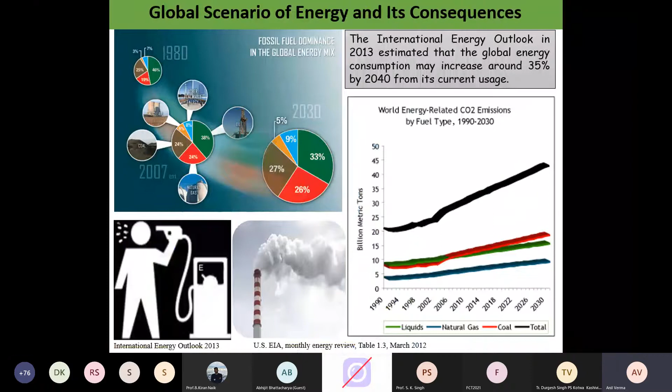Okay, not only that, not for the vehicle, and for other activities also, in order to generate the electricity that we are using, we have to be dependent primarily on the coal based power plant, which emits a lot of CO2. So this all indicates that the CO2 has to be captured, or it has to be sequestered. So just one technology, which is the CO2 capture and sequestration, I'll discuss.

So if you talk about the CCS, which is the carbon dioxide capture and sequestration, it primarily consists of three terms: the capture, the transportation, and the storage. Okay, so typically if I give you some data, in a pulverized coal based power plant, you can get around 13 to 15% CO2 in the flue gas. This is a typical data. Okay, so 13 to 15%, it can vary.

So the present technologies in the capture domain are post combustion, pre combustion, and oxy fuel firing. So if you see post combustion, as the name is indicating, you are going for the combustion, then after that you are capturing the carbon dioxide. So if this is a coal based power plant, the fossil fuel and air you are utilizing for burning of the fossil fuel.

So you are using the air, and air is having a lot of nitrogen, which is around 79%. So that dilutes the CO2 in the stream. But anyway, we have to capture it. So we capture it, and then this carbon dioxide is ready for some purpose. It may be for storage or for some other purpose.

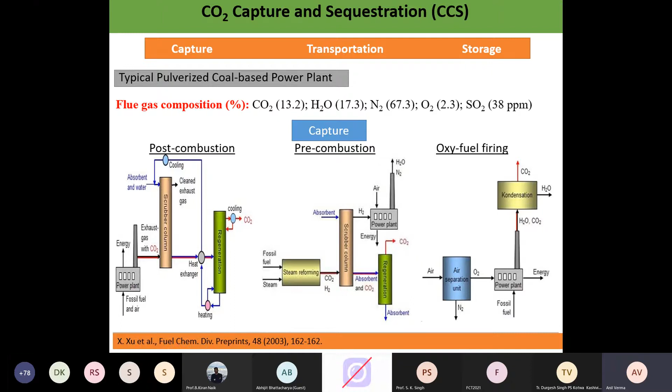Similarly, the oxy fuel firing. In oxy fuel firing, we separate the nitrogen from the air. So this is the air separation unit. We take out the nitrogen, we send almost pure or very high concentration oxygen into the power plant, so that once we get the carbon dioxide, it is not diluted with the nitrogen. Otherwise, if it is diluted with the nitrogen, then the separation process is a little tricky and more cumbersome.

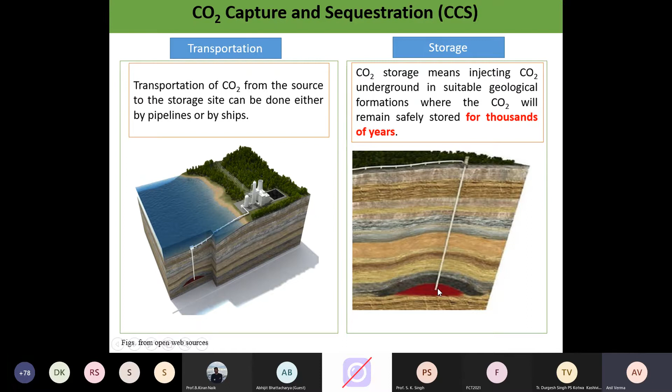Now, once the CO2 is available, we have to transport it. Then we have to store it, and storage is primarily in the geological sites, with the expectation that maybe in thousands of years we can get the hydrocarbon, but 1,000 years is a long time. Okay, very huge duration. So that may not be feasible, and at the same time we don't know what the after effects are once we store this CO2. Also, storing the CO2 in these geological sites requires a lot of energy. So again, that's an issue.

Therefore, people are trying to convert this carbon dioxide into various products. There are various technologies like chemical reduction by metals, thermochemical, photochemical, and so on, and also the electrochemical route. So we can make methane, we can make methanol, or from methanol we can go for dimethyl ether, or we can make syngas from CO2, CO plus H2. Once the syngas is there, this is basically the building block for all the other chemicals, and we can synthesize the other chemicals.

For example, methanol and DME are being considered for transportation fuel in India. And if I just tell you about Brazil, they are using M15 and M85 fuel, which is known as FFV or flexible fuel vehicles. That means 15% methanol they add in the petrol or diesel, and similarly 85% also they can add in the motor fuel.

But at the same time, the government of India has also mandated that around 5% ethanol should be blended with petrol, and the target is that by 2025 it should be 20%. But the issue is that we have to make the ethanol. Now ethanol is used for a lot of other things, and how they are produced, so there are a lot of issues.

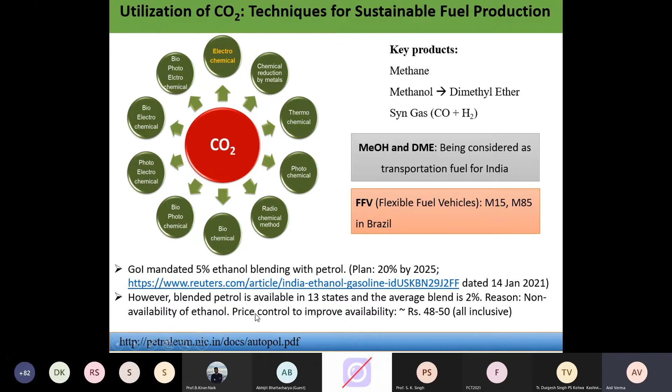So blended petrol is hardly available in 13 states, and the average blend is around 2% because of the non-availability of the ethanol. Okay, so also the price control to improve the availability and all those things are also there. So I'm not going into those details.

Now, one of the future technologies for sustainable development is emission to liquid. That means from the carbon dioxide, if we can make some fuel, it may be liquid or it may be solid or gas, but here I've just written emission to liquid. Okay, so I will talk about one technology which is electrochemical technology, where we can use the carbon dioxide and the water to make various products, various chemicals.

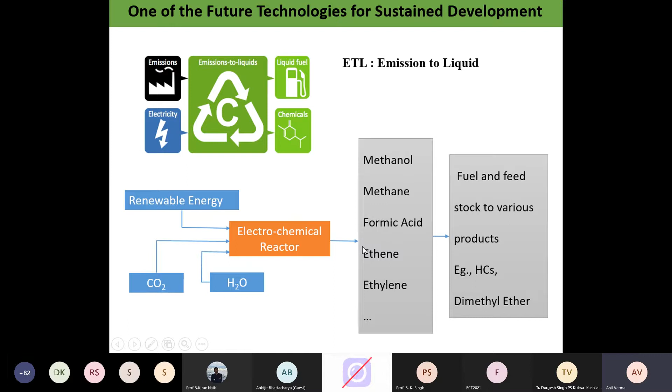So these synthesized chemicals can further be used as a fuel and feedstock to various products. Okay, and also, if it is methane we can use it as CNG, fuel for the CNG vehicle, and we can also make other fuels. So what is the concept? The concept is simple. The concept is the electrochemical reduction of carbon dioxide into fuel.

So the carbon dioxide that we are capturing from the point sources and the distributed sources, that means from the environment or from the flue gas, we are able to take out the carbon dioxide. This carbon dioxide we can push into the electrochemical reactor along with the water, and because the reaction of the CO2 and the water is a non-feasible reaction, you have to provide energy in order to get the reaction.

Okay, so we can use renewable energy, for example wind or solar, and if we utilize that energy to convert this CO2 and water into fuel or chemical feedstock, then we are primarily reducing or utilizing the carbon dioxide, making fuel and chemical feedstock, and at the same time we have taken this renewable energy and converted it into chemical bonds.

Okay, so renewable energy storage is also there. It looks very fascinating, but it has a lot of challenges, because first thing is that the technology is not mature. Okay, proof of concept is done. People are working to solve a lot of issues, and this technology is slowly taking momentum. In fact, it has taken a good momentum.

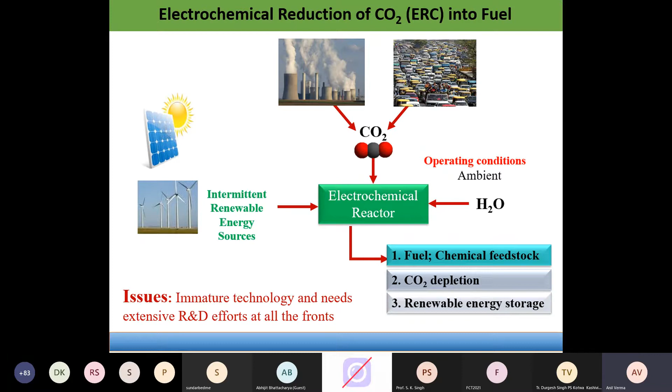In fact, there is a special journal launched, I think, 8 to 10 years ago, the Journal of CO2 Utilization, which has an impact factor of 5. So you can understand how many people are reading and using those research papers. That shows that R&D efforts are going on, and maybe soon we will have this technology at the industry level. So the basic principle is very simple.

So what happens? The water breaks in the anodic chamber, and it provides the electron and the proton. This electron and proton react with the carbon dioxide in the cathodic chamber and provide, for example, methane. Here in this case you can see it is methanol, and the overall reaction E naught is minus 1.06, the standard potential, minus 1.21 volt. So that means we have to provide this energy.

Though these are the two reactions, the main important thing is that for the H+ that we are generating, in most of the cases, or in almost all the cases, a significant part of this H+ recombines with the electron and gives hydrogen gas.

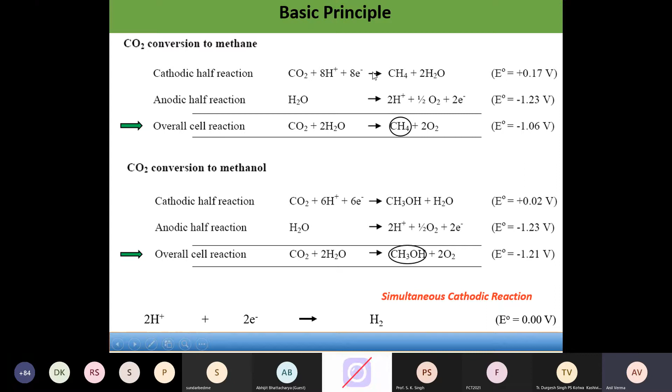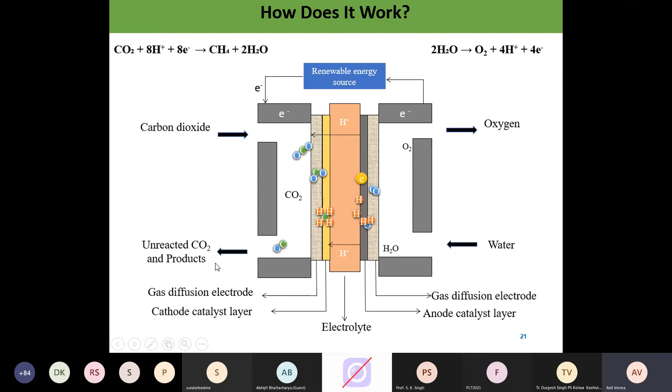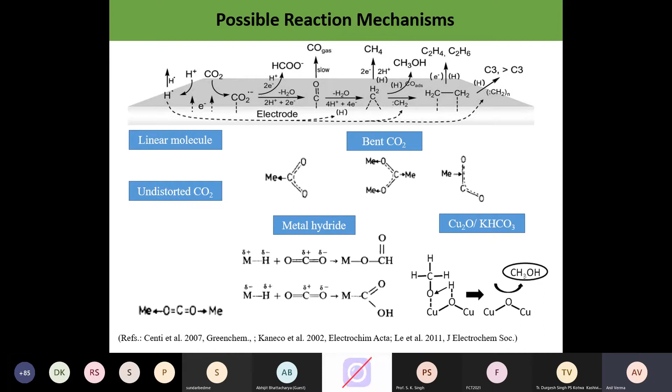So why is a lot of energy required for CO2 conversion? The reason is that CO2 is a straight molecule. O double bond C double bond O, 180 degrees. So in order to make it active, we have to provide the energy so that we can bend the molecule. Once we can bend the molecule, then it will go for the reaction, or we have to ionize the carbon dioxide into ions by bending or by providing the electrons, so that it can easily take part in the reaction.

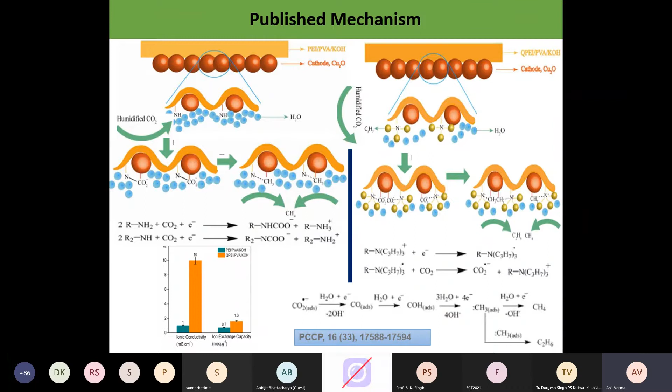So we have proposed the model where we have made a newer membrane, which is a polyethylene imine based membrane in the KOH environment. We have given that mechanism, and it was published in PCCP, which is a very good journal. And there we have discussed how that particular membrane or the electrolyte affects the selectivity as well as the yield. So the performance of the developed electrolyte for ERC we can see over here.

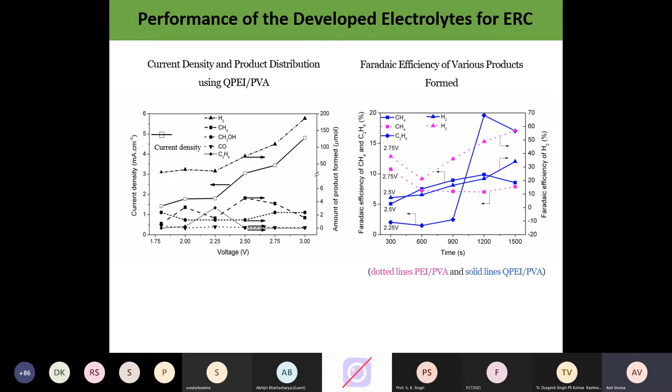We can get C2H6, CH4, and in certain cases you can see methanol also. The Faraday efficiency for these C2 products and other products is maybe 10-15%. But in certain products, results I am not showing, we are getting up to 60% Faraday efficiency. So this is just a glimpse of one of the CO2 electrochemical technologies that we have seen.

Now, coming back to motor vehicles, we have seen that the global motorization level is increasing. That means urban motor vehicle traffic will also increase, and this disruptive rapid increase in urban traffic is posing serious sustainability issues. What are the main concerns? Number one, air quality. Number two, the need to comply with greenhouse gas emission targets.

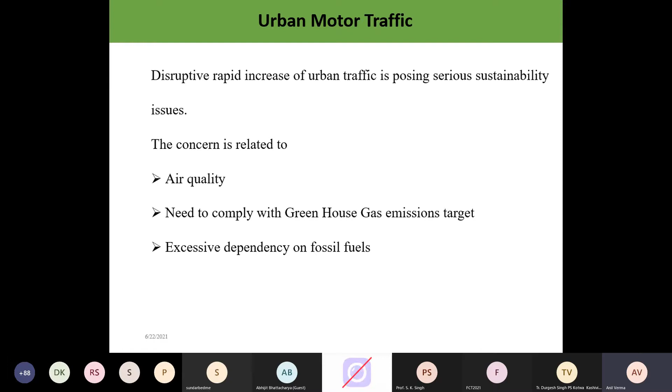So we cannot say we don't bother about air quality, because we are in the IPCC also. The government of India and all the governments have given some targets: we will achieve this target for greenhouse gas emissions. So we have to comply with that. At the same time, we are excessively dependent on fossil fuels, so that dependency we should also reduce slowly.

Now, there are two strategies. One is the short-term strategy. That means whatever IC engines we have, we have to increase their efficiency so that per kilometer of distance covered we require a little less fuel, and at the same time waste heat harvesting: whatever heat we are wasting, we have to harvest or utilize it. At the same time, hybrid power trains are there.

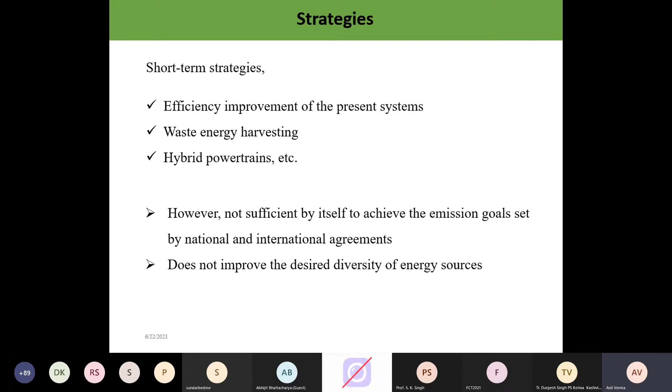However, these are not sufficient. These are the short-term strategies, and they are not sufficient. We have to come up with newer technologies. So for long-term technology, if I focus on the vehicles only.

So the main alternatives to the traditional internal combustion engines are the plug-in hybrid electric vehicle, or the full hybrid, or the full electric vehicle, which is known as either electric vehicle or battery electric vehicle; it is the same thing. So PHEV, which is the plug-in hybrid electric vehicle, is nothing but you have a plug on board, apart from that hybrid engine.

And EVs allow reduction in the global fossil fuel consumption. Also, it is the key technology for the future smart grid. So just quickly, if I see the classification of the electric vehicle, I can see the types of vehicles that we have: the traditional vehicle uses gasoline or diesel as the energy source, and the propulsion is with the help of the combustion engine, right?

If we are talking about the hybrid vehicle, hybrid means we have the two technologies. Propulsion will be from the combustion engine, and it has the combustion engine as well as the electric motor. So I'm not going into the detail of these hybrid electric vehicles. Ultimately, I'm trying to focus on the battery electric vehicle and the fuel cell electric vehicle, and in future maybe the solar electric vehicle also. The solar panels may be so effective that you can just put them on the rooftop, and they will provide enough energy so that you can charge the battery, or you can directly utilize it.

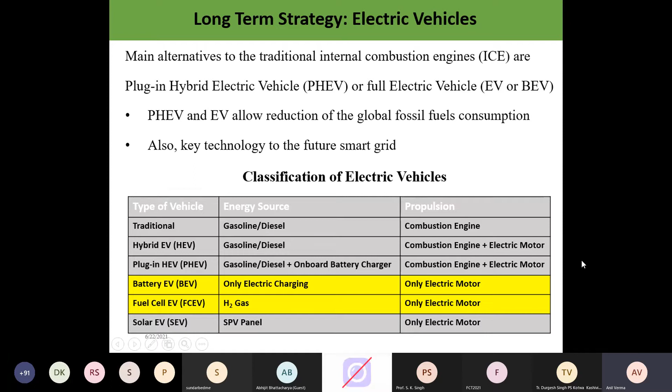So let us see the fuel cell in demonstration and the bottlenecks. I'll talk about the battery vehicle also in a short while. So fuel cell in demonstration and bottlenecks: we have been talking about the fuel cell for the last 30 years in India at least, from the 1990s, or in fact before that. Some initial research was there at that time. Then a lot of people have worked on the fuel cell, but still, the fuel cell is not in the market. Nobody owns a fuel cell, at least in India. They are in the demonstration stages. Even worldwide, these are not commercialized. They are in the demonstration stage.

He has also discussed that the maximum theoretical voltage we can get from a single fuel cell is 1.23 volt, right? But that is in the standard condition, and if it is 100% efficient, but no system is 100% efficient. So irreversibilities or losses are there. Once the losses are there, if you draw current from the fuel cell, the voltage drops down. The IV characteristic he must have shown. So the operating voltage of a single cell is typically 0.6 to 0.7 volt, right? And 0.6 to 0.7 volt is not enough to run any electric motor, right?

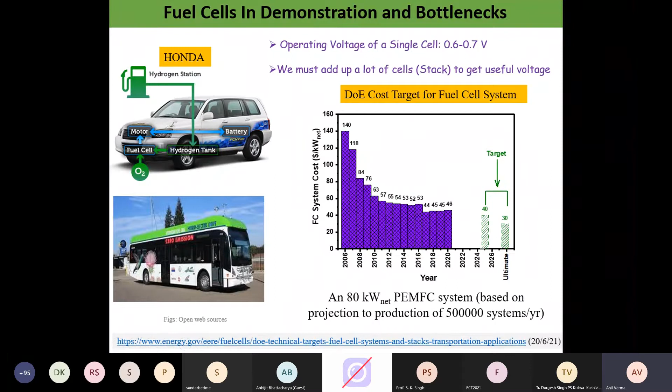Now, because the single cell does not give the meaningful voltage, we have to add a lot of cells in series. So that integration of all the cells in series is a very tricky job, and that is one of the important parts also. So how we connect the two cells in series, we don't simply take the wire and connect. We have to connect face to face, so that there should be very less electrical path length to have the reduced voltage loss from the system. So that kind of plate helps to get this, and at the same time it helps to supply the oxygen and hydrogen gas also.

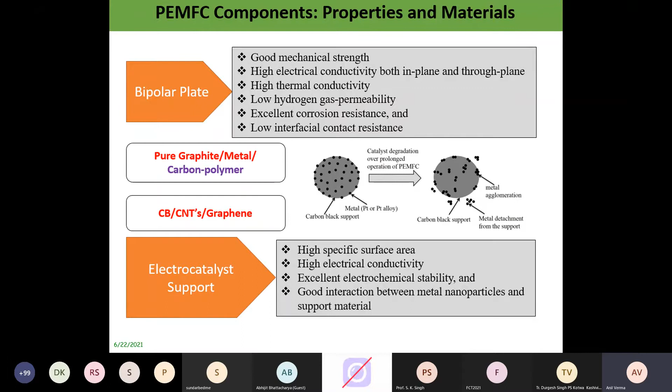For example, an electrocatalyst support should have very high specific surface area, high electrical conductivity, excellent electrochemical stability, as well as good interaction between the metal nanoparticles and the support material. Otherwise, they will come out from the support and agglomerate, and it will reduce the efficiency of the system.

So we worked on the carbon polymer composite bipolar plate, and we have published a lot of papers, which have got good traction. We are comparing the Sigracet PPG86 bipolar plate with the plate that we have made in our Sustainable Environment Research Lab, SERL. The electrical conductivity desired is more than 100 Siemens per centimeter. The plate available in the market has very good in-plane conductivity, but the through-plane conductivity is not up to the mark.

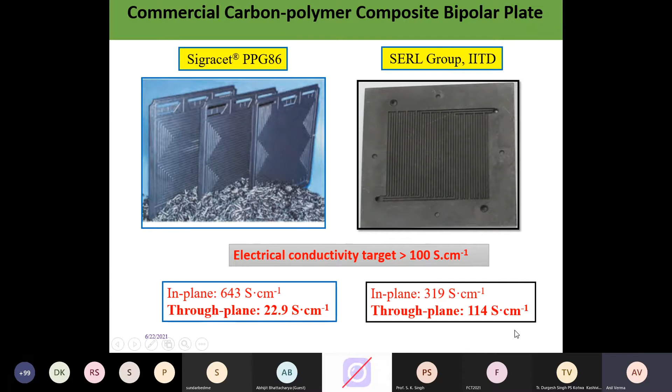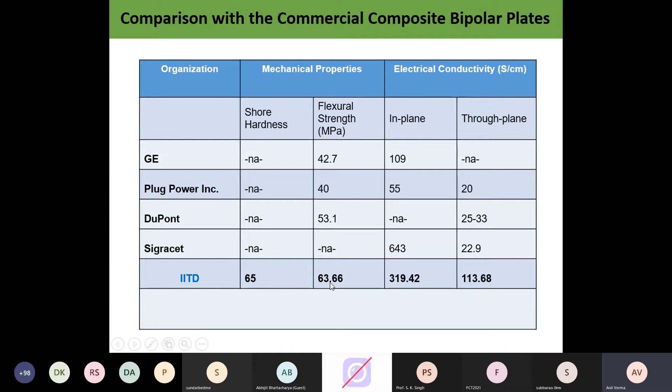So we have made this bipolar plate where the through-plane conductivity is more than 100, which is desired, and in-plane conductivity is definitely sacrificed. But anyway, both should be more than 100. And if I compare with other commercial bipolar plates, for example from GE, Plug Power, DuPont, and Sigracet, and this is the IIT one, we have got good shore hardness, good flexural resistance, and good in-plane and through-plane electrical conductivity. We have tested one or two results.

I'll just show you. The two-cell result you can see over here, where we have used 0.2 mg platinum per centimeter square. The temperature is also moderate; we have used only 50 degrees centigrade. With the two cells we are getting a maximum power of roughly 1 watt per centimeter square. So if you have a 100 centimeter square single cell, you will get roughly 90 to 100 watts. If you add a number of cells, say a 50-cell stack, then the calculation will change.

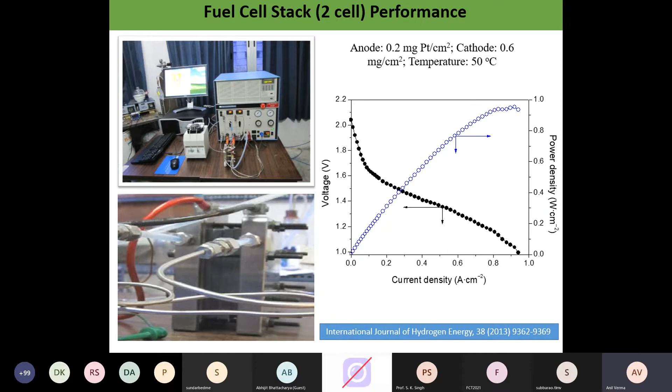So this fuel cell we have seen. We will also talk about battery-based electric vehicles. This will ultimately be used for electric vehicles, stationary as well as mobile applications. Now, in order to cover the various electrochemical technologies, let us see another technology, because these are discussed on a day-to-day basis in the newspaper and in peer groups. So I thought I'll talk about these technologies in a very simple way, so that we can have a feel. So now we will talk about battery-based electric vehicles.

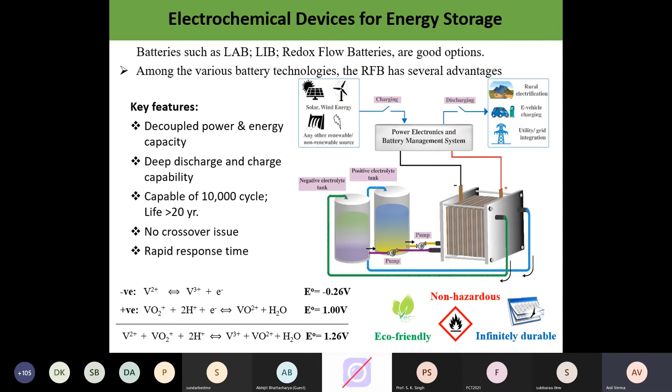Crossover: here I am talking about the vanadium redox flow battery, and you can see the reactions. Both sides have vanadium in different oxidation states. If there is any crossover, some leakage in the cell from positive to negative, it won't hamper much, and that can be repaired. We have patented some technologies in that respect that I will show. I am not going into the details of these vanadium reactions. And as we have discussed, it has decoupled energy and power. So if this is the flow battery system.

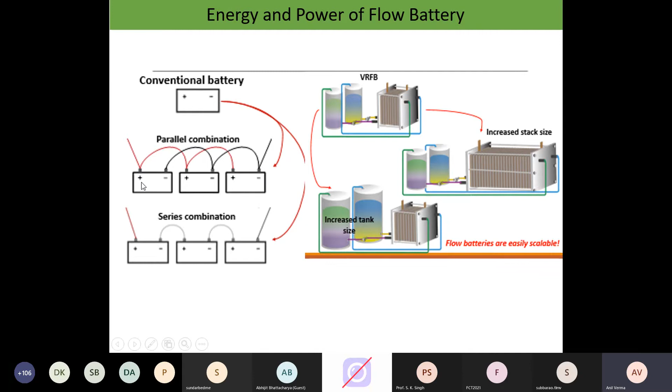So if I want to increase the power from the system, then we can increase the stack size. If we want more energy, we don't touch this power part, which is the stack. We can increase the tank size. Okay, but in the conventional battery you can't do that. In the conventional battery, whether you have to increase the energy or power, they are not decoupled. You have to increase both.

Okay. Now we have done a lot of work from the last 6-7 years. We are working... ultimately whatever reactions are happening, they are happening at the electrode. So efficient electrodes are very important. So we have made some electrodes which are very good and showing power a few times more than the conventional one. So on this we have filed a patent also.

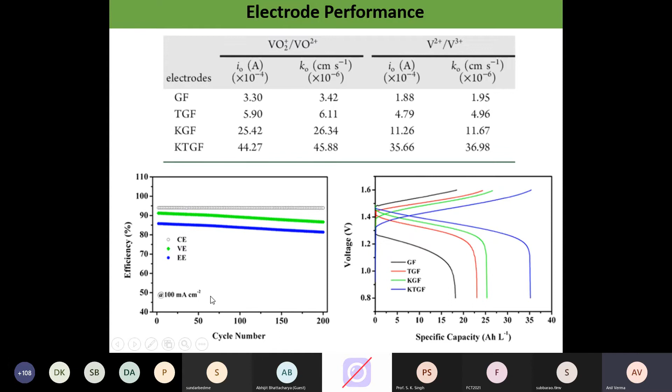Then the performance you can see over here, in terms of the exchange current density and the reaction kinetics or the rate of the reaction. KTGF is the one which we have developed. So the energy efficiency is very high. The overall energy efficiency, if you see, is more than 85%. This is the Coulombic efficiency, voltage efficiency, but the overall energy efficiency is around 85 plus, at 100 milliamps per centimeter square, which is a huge current for this particular system.

We are also working on various engineering approaches for capacity prediction: how much electrolyte we should have so that we can run our system. So we have gone through various calculations, and we have got some dimensionless numbers. This is the TCU, NVU, Wagner number, reciprocal of Damkohler number. These two numbers are already in the electrochemical space, but these two new dimensionless numbers we have proposed, and this is accepted by the Chemical Engineering Journal, which is a very high impact factor and very renowned journal.

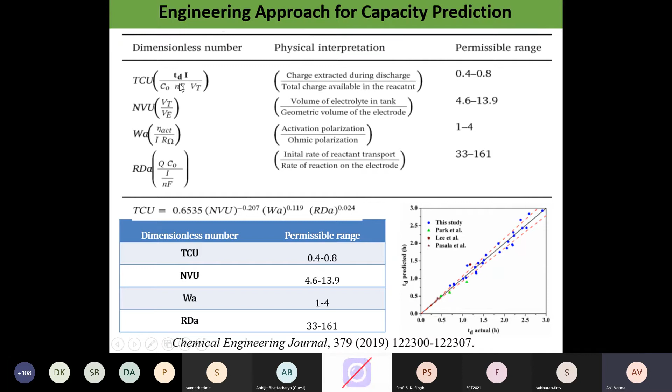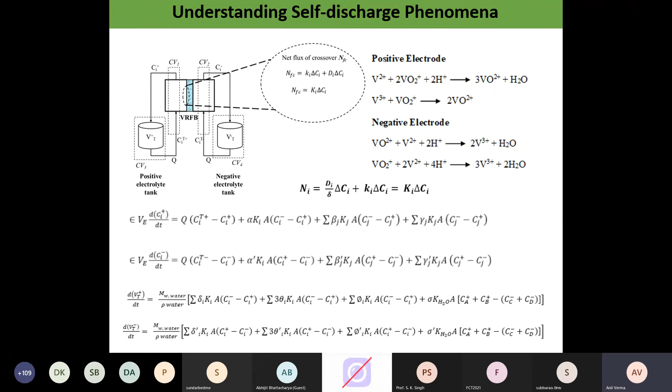So now there are TCU and NVU. There are also permissible limits for this equation, so that we can use it and find the TD. TD is the time of discharge, for how long we can discharge the battery. We are also understanding the self-discharge phenomena. There are some mathematical equations, which we have used from our own work and also from the literature, and we are working on that to understand the self-discharge phenomena. Just quickly, I am telling these points.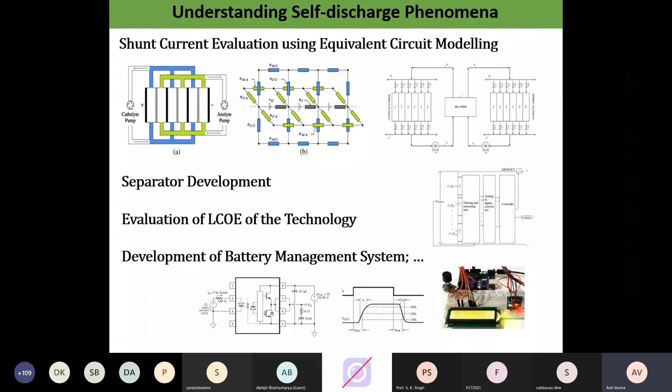We are also trying to understand shunt current evaluation using equivalent circuit modeling. And we are working on separator development, because the separator is one of the important components of this flow battery, which is limiting the wider use of the flow battery. We are also working on the development of the battery management system. In my group, we have electrical engineers, mechanical engineers, electronics and telecommunication, instrumentation engineers, and of course chemical engineers, physicists and chemists. It's a team of around 15 to 20 people working on different parts of this battery and other technologies.

So with that, I'll just tell you a few other things. Recently, in the last 2 years, we have filed these 6 patents on this flow battery only. 2 are international and 4 are national, and we have developed the prototype. Ultimately, whatever we are doing, if it is only in the lab, it doesn't make any sense. It has to come to the market, or at least to some level, so that the industry can pick up that technology and utilize it for the larger benefit of society.

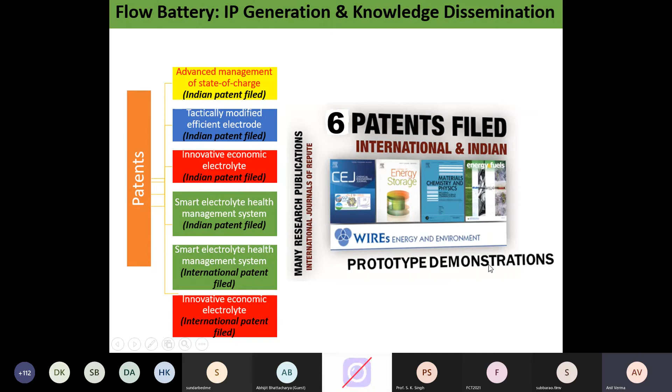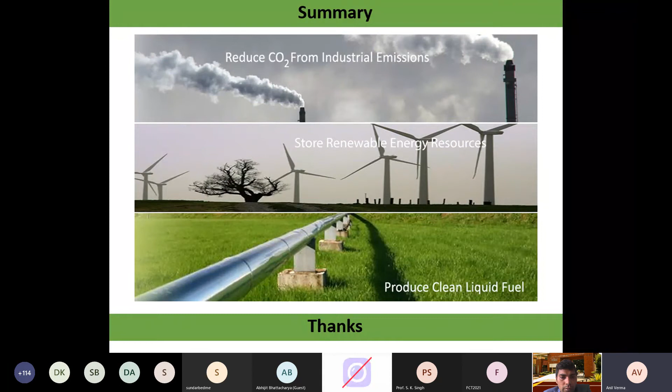So, with that story, I would like to thank everybody, and I would like to summarize. I have discussed three things: reduction of CO2 from industrial emission, storage of renewable energy. Ultimately, we have to produce clean liquid fuels. So this was all about.